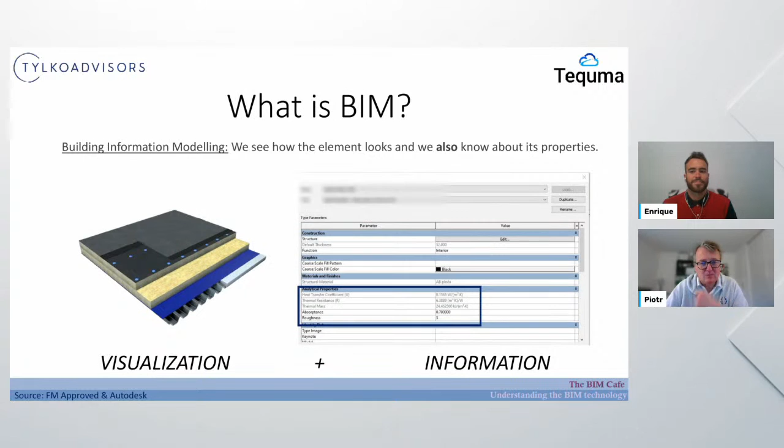But you're saying that with visualization and information, only these two things, we can build the whole model? Well, in theory yes, this is the key of what we're doing. We create geometries to produce models and put in information as input. This is both concepts we need: creating the shape, the look, the texture and colors of a product, and implementing that information inside, creates a BIM object. Okay, I understand, that's interesting.

So in terms of visualization, going a bit deeper, it's creation of 3D models. It can show real or very similar colors, textures, the full structure of how it will look in real life before the design or construction phase is finished. It can also give a pre-visualization in the design or concept phase. We also have a powerful tool called renderings, which can simulate natural and live conditions of the space. For example, this small image of a house can show clouds, sky, the sun at 3pm at this latitude, so we can really see how close this will be to real life in terms of visualization effects.

Does rendering require special computer power, or anything special do I need to do this? This is one of the most consuming tools in terms of software, it requires good software, which we'll talk about later, and can run a bit slow when the project is very big. So you need a good computer and good software, but it's accessible for everyone. On my laptop, I'm not the most high-tech guy and I can run these things, so it's not out of reach for anyone. Okay, understood, thank you.

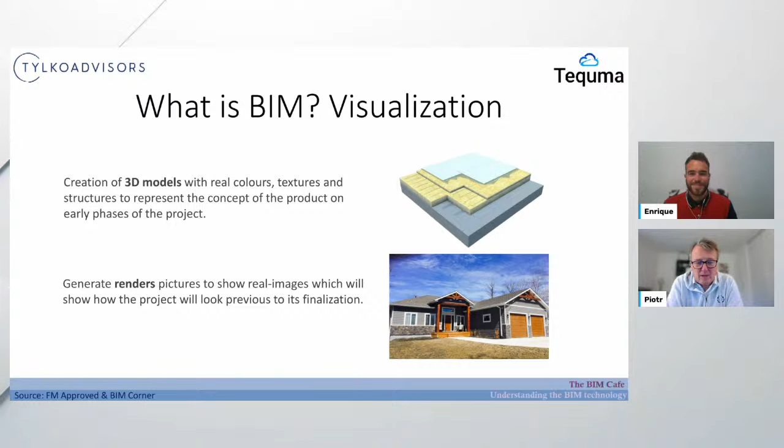Good. So on the second part, the information part: whether you're a manufacturer, an architect, a constructor, or whatever your field, you can get benefits from BIM because there's information you want to deliver into your product or project, and that information is inside the model. So when you go inside the object in the BIM software, you'll see the information inside, and you can access that information and edit it.

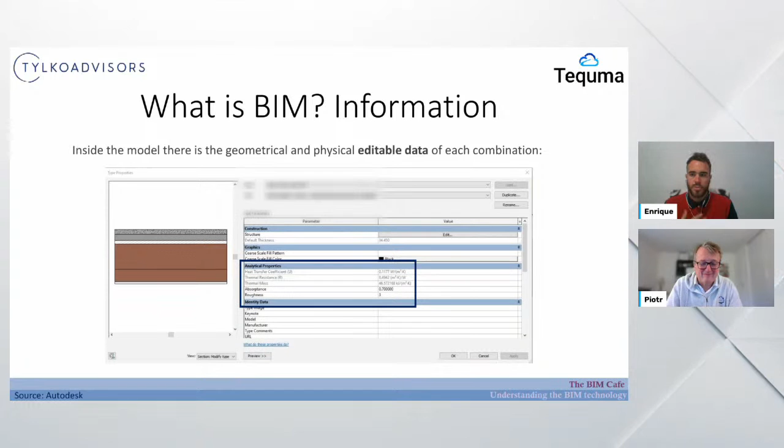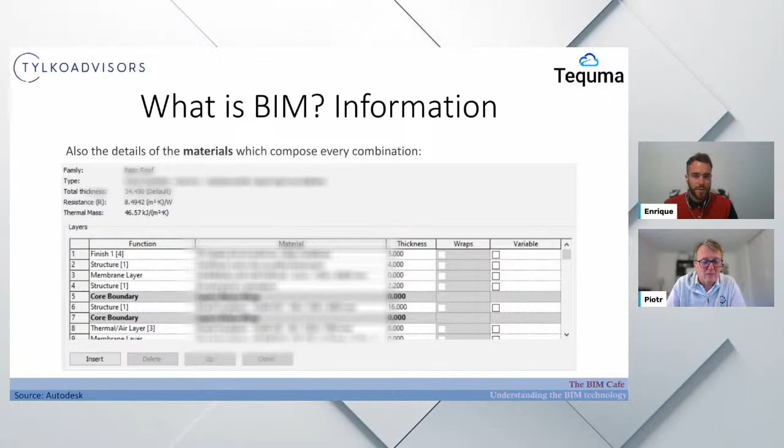We are talking about different levels, not only about the product or the whole system composed of different materials, like a wall. We can also go inside those materials. There is a library for those materials where we can see the structure of the material that composes a specific wall or product, and we can go inside and edit them individually. So we are creating our own library of materials with fully editable properties that will run in our project.

One of the things that always comes to my mind as a question is that you have so many different producers of materials. So how are they connecting on the same level, on the same standards? It looks very difficult to me. I'm just showing one here, but there are thousands of different construction companies or material producers. How will they all have the same structure?

Well, that's why BIM is an important part of the construction industry, because the BIM files can be attached to specific software like Revit or Archicad in terms of design. But there is also the IFC format, which is the open source file, and everyone needs to stick with it and use the same structure to share information. So if I'm a manufacturer and want to provide my data in BIM, I need to make it readable for specific software or make it open source as the IFC format. So I need to stick with them.

So I hear what you're saying. It means I need to have special software or a special structure of data. It's kind of unknown for me right now. So what needs to be done for me, as a material producer? I want my material to go into the cycle of the BIM supply chain. What are the two or three things I need to do to make sure I'm accepted into the whole supply chain, into the BIM world?

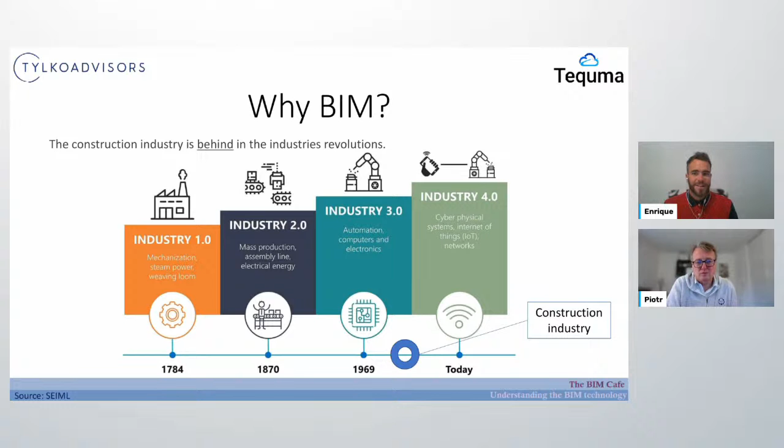Because there's so much production, chain production and things they can do very manually. And we still will need humans, we need the hands, but in a different way. So BIM as a technology or methodology is the tool that the construction industry needs to be pushed to today's basis and move it to Industry 4.0, or the fourth revolution. That's important for me.

This is some topics we will go deeper on in next episodes about what services BIM can offer, and we will list most of them. But basically, the good thing about BIM technology in the construction industry is that it can cover from the conception, the design phase, the planning phase, up to the demolition. It can carry out the maintenance, of course, the construction design. All the phases can be covered by BIM. So it's not only a tool that's needed in one phase, it's carried out during the whole process of the construction.

I hope the demolition is not the goal of BIM. Well, that's good, thinking about sustainable demolition. Because all buildings at some point need to be taken down. So it's also important to do it in a wise way, carrying out all the material emissions during the whole life cycle of the product. That's what I meant about demolition. It's a very scary word, I know, but it's to be also taken into account.

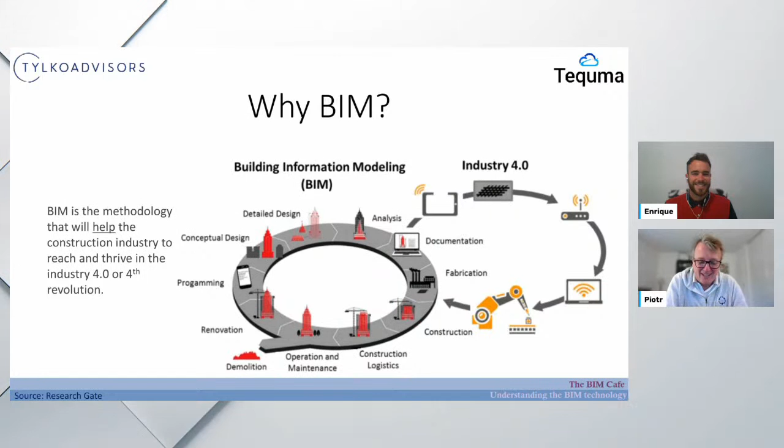Okay, got it. I think we need to change the title of our sessions. It's not BIM or not to BIM, but just BIM for the new world. Right, okay, got it, I understand. Thank you very much. You're welcome.

So now, after talking a bit about the BIM construction industry and the BIM effect from that technical perspective, why do we need to use BIM as a user? As a designer, in terms of construction and architecture, or AEC - architectural engineering and construction - side, before, when we run a project, we need to use very different software, which incurs more license, more computer expenses, and specific requirements to run the software.

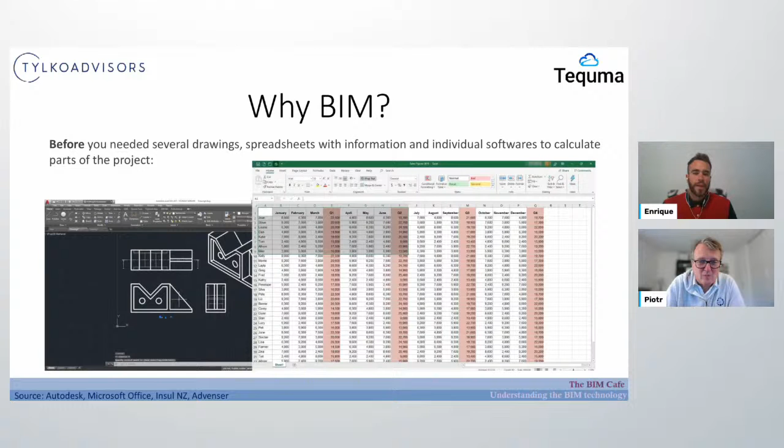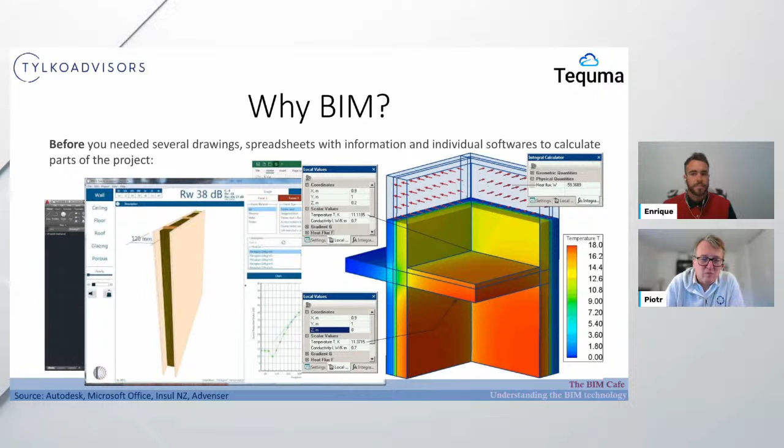For example, design in 2D, we need to take data using spreadsheets or other calculation programs. We need to run simulations, for example, for soundproofing with different software, and we use another one to do thermal ones. You see many different software involved in running a project. Now with BIM, the main power of this is we can have everything in one unique, coordinated, and collaborative file, which runs the simulations, takes all the data, stores whatever input or spreadsheet we give it, and we can export them, get all the information out from BIM as well.

So everything is managed in one unique file and software. No more problems of having different types of files and people who run this or that software. Everything can be done in one unit.

So BIM, what you're telling me here is that BIM is not only the technology itself, or just the way of exchanging data, but it's also the collaboration between the different teams, right? So that's on top of the visualization and the information, there's also the collaboration part among the various actors in the supply chain of construction.

I will bring here, as an appetizer for the audience, this common data environment, something I would like to go deeper into in other sessions. It's setting BIM as a common data environment for working a project, so everyone working on BIM has the same understanding. It's like having a group of friends who all speak the same mother tongue - you don't need translations. You all stick to the same software where you share information, and changes made by one part are automatically synchronized everywhere.

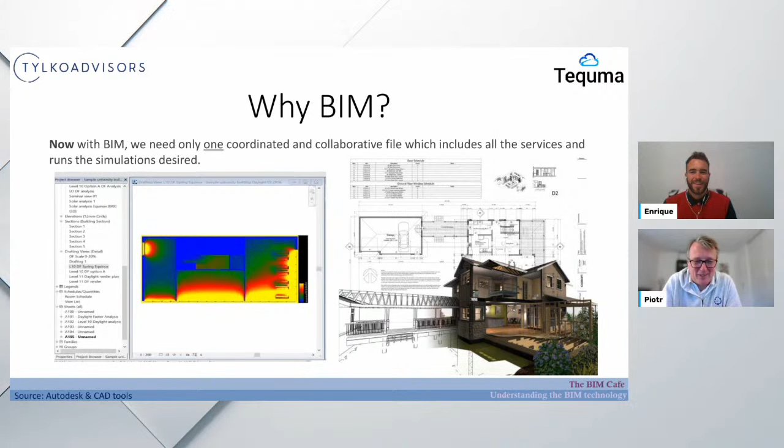Sounds very nice, right? Yeah, but I'm just not sure if it's so easy to do in fact. I'm still very skeptical about it. You asked your question at the right moment, because now we're going to talk about how to use this. It looks very nice, all those words, but how do we use this?

There is specific software on the market for different stages of the process. I'll pick and highlight the most important ones on the design phase: Revit and Archicad from Autodesk and Graphisoft. These software are mostly focused on design, used mainly by architects or engineers to create projects and input information. But they can also be used to calculate cost, export documentation, run simulations, carry out maintenance, and do life cycle assessment. So the options are not limited, but the main focus is on the design phase.

Of course, if the project is very big, you'll have specific software for other stages, but these two are the main ones, and a project can be fully run on these. So you're saying Revit and Archicad are the two main software used on the market today, right?

Yes, there's way more - for example SketchUp, or Navisworks which is also a visualization software from Autodesk, but there are several others, some more focused on making mechanical parts, others more focused on mechanical or structural settings. But these two cover pretty much the whole scope. For people or companies starting in BIM who want to produce their files with the information, those two should be the ones, as well as the open file source to be provided.

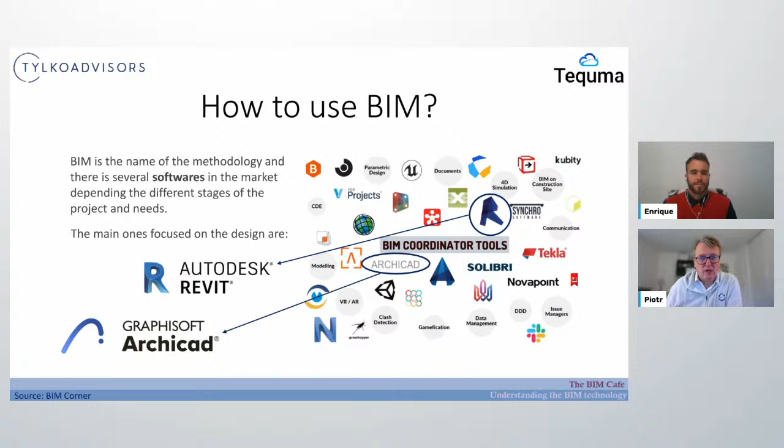So, quickly summarizing everything I said in a few concepts: what is BIM and what is BIM not. Remember, BIM - Building Information Modeling - is creating visual elements with information, with data inside. That should be the main concept. BIM is a technology, BIM is a methodology, it's collaborative, part of the digital information 4.0 industry, and it manages the whole project life cycle - from pre-conception, conception, design, construction, maintenance, everything up to demolition, in a sustainable way.

And what is BIM not? People get confused - BIM is not a specific software. We can have BIM files in terms of talking generally about documents, and people say let's talk about BIM files, but it's not a specific software. We just saw a couple of slides ago how many software there are, and those are not all of them. BIM is also not only 3D design.

BIM is also information - we don't just stay with the nice 3D image of a house in a backyard with sunlight. There's also information inside. There's something different between graphical design and BIM, because BIM carries the information inside. When you create a graphical design of a house with Photoshop, or Illustrator, or other design software, there is no information on the house.

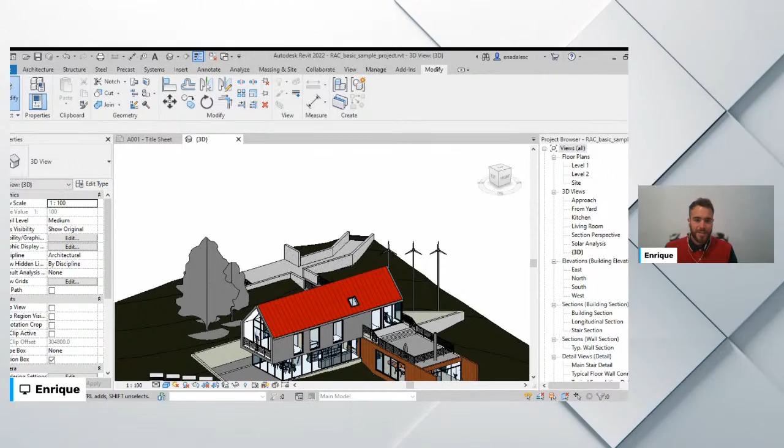Good, so on this Revit file we have a sample model from Autodesk, the provider of Revit, and this is what I call a model. This is the full structure of the model, and this is the 3D image, nice and beautiful.

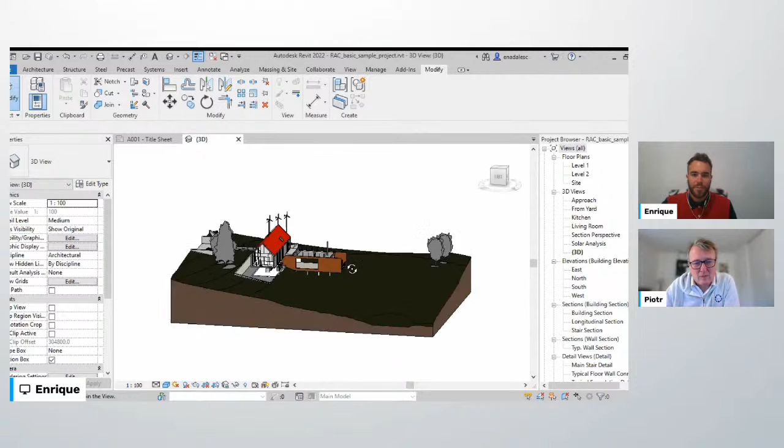We can move around, see the house, and see all the different elements that compose the house, such as windows, the roof, the walls, and so on.

And the main difference of this from graphic design software is that there is information on this model. This is not purely illustrative to picture ourselves how it will look when finished construction, it will show us actual information.

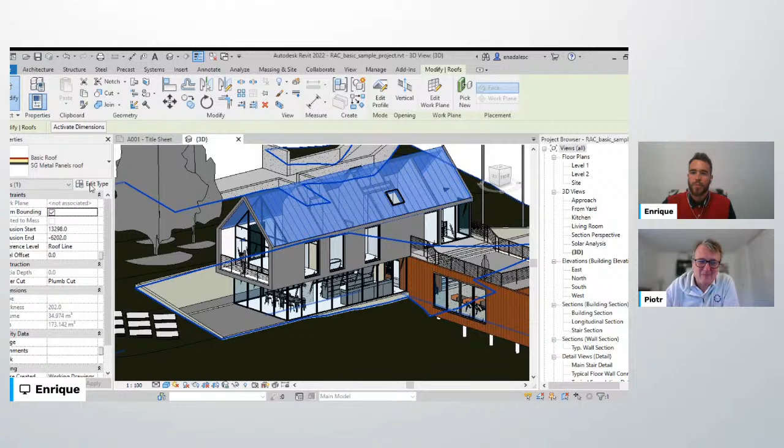So for example, you just select the roof. We can see the name of the roof, but if we go into details, taking into account the geometry, since the model is represented by geometry, we can see the structure, how there are different materials and layers on it, and the composing of those specific materials.

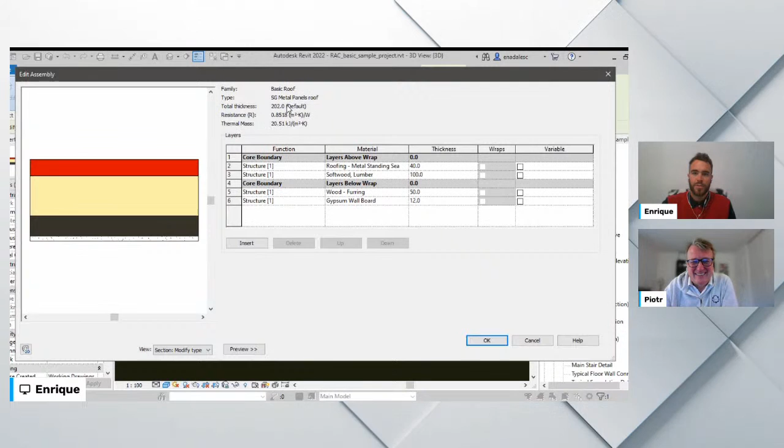And look here, nice data also provided by BIM. R value and thermal mass in this example. We can see more information that can be provided by the manufacturer.

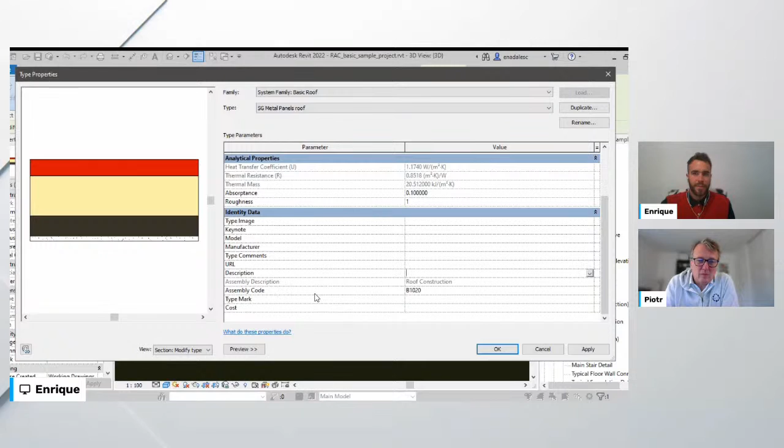So for example, manufacturer name, type, descriptions, assembly code, and even costs. This is fully editable, customizable. So in terms of what data I want to provide, just tell me, BIM will do it for you because it's there. And this applies to all the different instances.

So Enrique, I can enter all of this information, but do I need to enter it manually, or is this connected somehow with the supplier? Because if I need to enter all of it, I will just forget it. I will not enter it.

Completely, yeah, this can be done by a specialist. Providing the information, of course, you can have a BIM technician who will create those things for you, and there will be a person in charge to put the information into the model.

Yeah, but that's a waste of time, entering all of this data manually. No, I will just not do this. Is there any way of entering this automatically?

Yeah, there is an interface to create automatic generation of models on demand, so we can do it by filling out a spreadsheet or online form, providing the data, and the models will be generated with your information inside. So there's no need to go one by one and fill.

Okay, I need to go for this property, let me try to find it on my technical data sheet. Look, the parameter is not there. What can I do? You can create them. This can be done fully manually as well.

Of course, it doesn't need to be done by you, there are specialists who can run these services for you. So there's no need to be scared of, wow, so much data for too many products.

No, okay, good. So I think that's something we need to explore, because I'm not convinced if we will just need to enter this data myself. What you saw is one of the parameters.

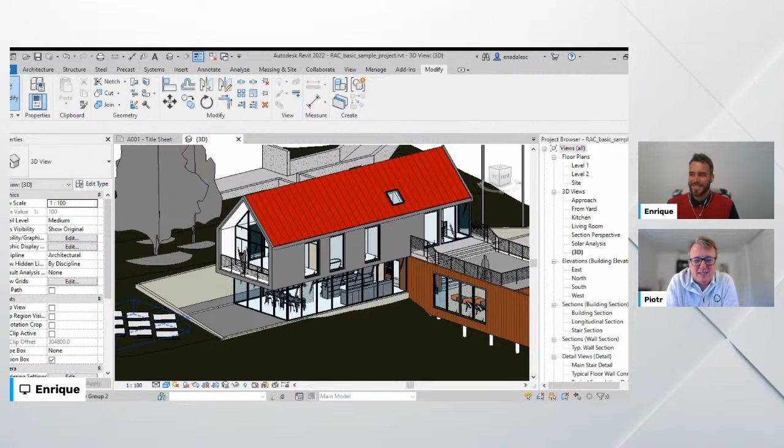So maybe we just need you to help me understand how to really build this stuff and make it into one quick interface.